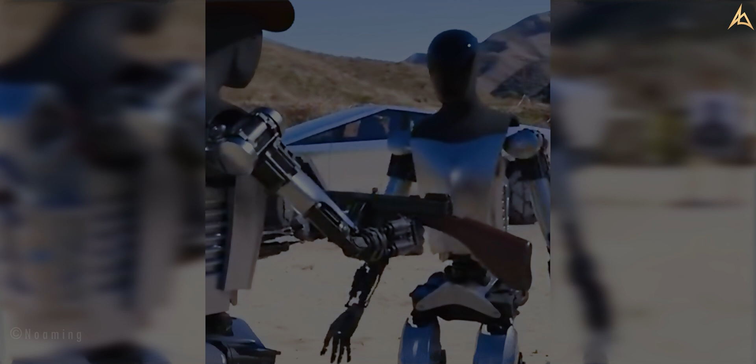For centuries, robots have been the stuff of dreams and nightmares. From the silver screen to factory floors, they've captured our imagination, fueled our anxieties, and hinted at a future where machines and humans coexist.

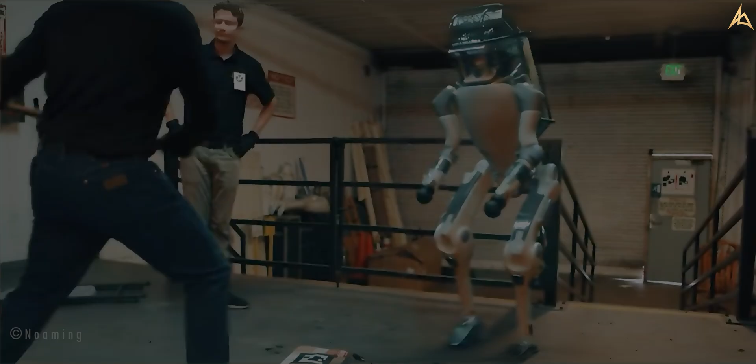We built our world for ourselves, skyscrapers that pierce the clouds, machines that dance to our commands. But what if, one day, those machines reached back?

Welcome to Tesla AI Day 2022. I do want to set some expectations with respect to our Optimus robot. As you know, last year it was just a person in a robot suit.

The Tesla bot promises to revolutionize the way we live and work, from the assembly line to the operating room, from the delivery truck to the construction site. These machines will change the game.

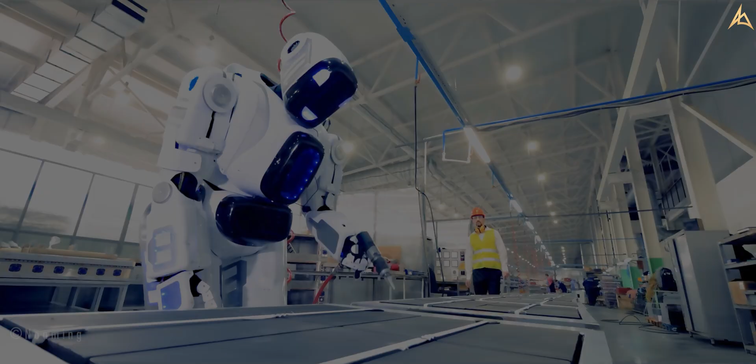But this revolution comes with a question. What happens when robots can do our jobs better than we can? What happens to the workforce, to our communities, to our very sense of purpose?

The rise of the Tesla bot is not just a technological marvel. It's a catalyst for a deeper conversation about who we are, what we value, and what it means to be human in a world increasingly shaped by machines.

The future is coming, whether we're ready or not. But with careful planning and ethical considerations, the Tesla bot can be a force for good in the world. It can be a tool to empower us, to free us from drudgery, and to create a brighter future for all.

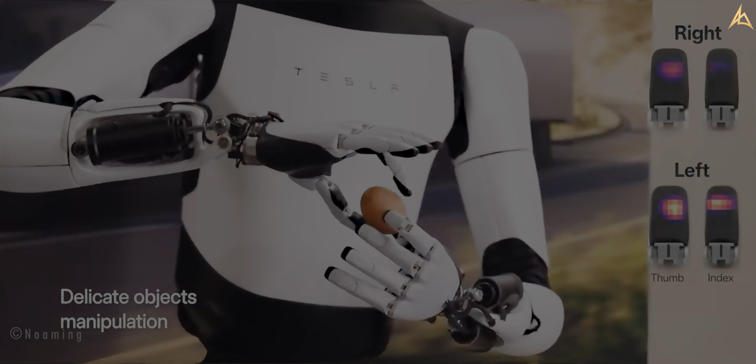This is the story of a revolution, not fought with weapons but with wires and code. The rise of a new species, born from our own ingenuity, yet destined to change everything. They are the Tesla bots, strong, agile, and eerily familiar.

They can build our homes, care for the sick, and even save our lives. But can we trust them? And more importantly, can we trust ourselves with the power we've created?

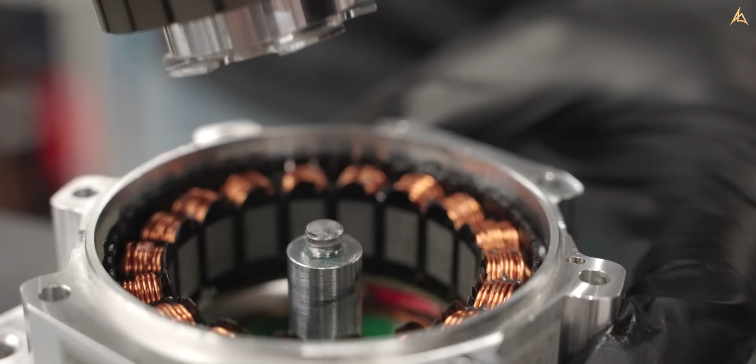In the heart of Silicon Valley, where dreams are forged in circuits and code, Tesla isn't just building cars anymore. They're building the future, a future where humans and machines walk hand in hand, not just on Mars, but right here on Earth. And at the center of this revolution stands the Tesla bot, a humanoid marvel poised to change everything.

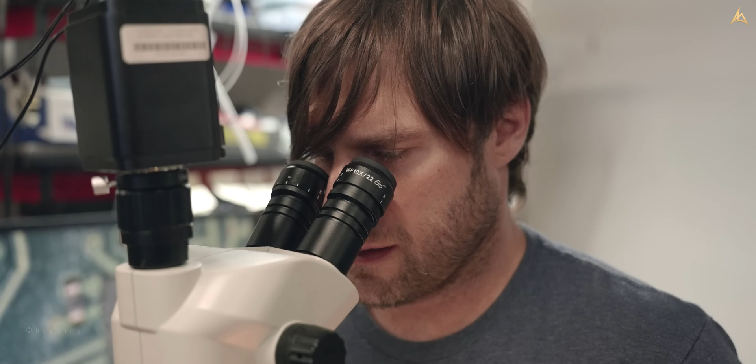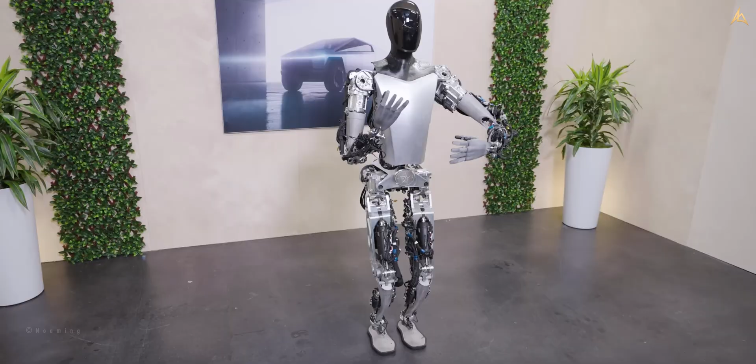Years of research, billions of dollars, and the unyielding vision of Elon Musk have culminated in this marvel of engineering. From the whisper-quiet electric motors to the intricate artificial muscles, the Tesla bot is a masterpiece of robotics.

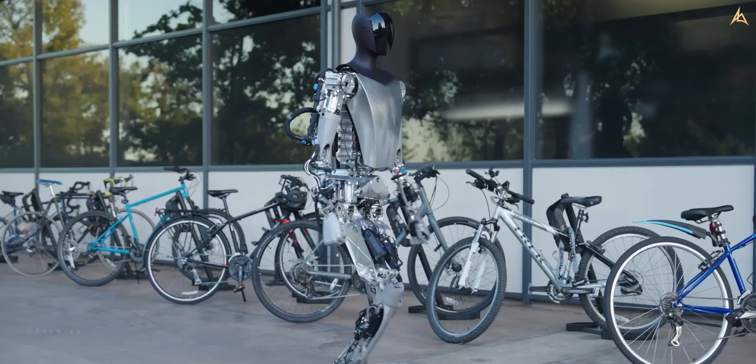It's not just about building a robot that can walk and pick things up. We're trying to create a machine that can understand the world around it, adapt to its surroundings, and interact with humans in a natural, intuitive way.

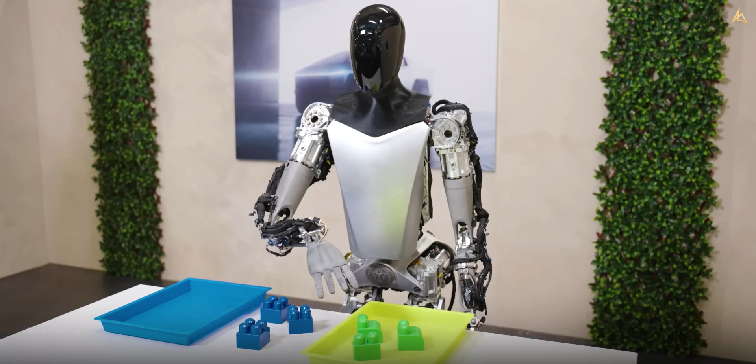But can this technological marvel truly become a part of our world? Or is the Tesla bot destined to remain a lab experiment, a glimpse of a future we're not yet ready for?

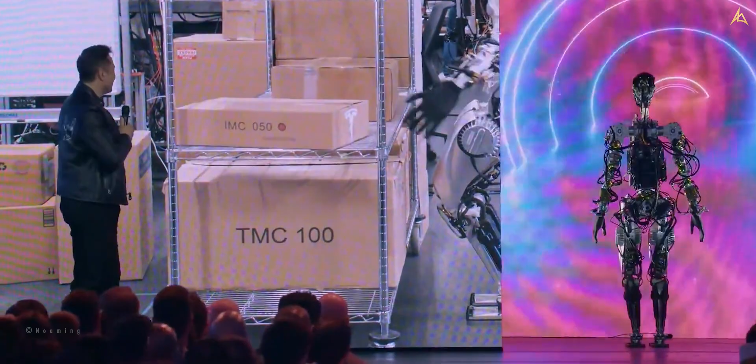Early adopters across the globe are getting a taste of this robotic future. For some, the Tesla bot is a helpful companion, easing the burden of daily chores and providing companionship.

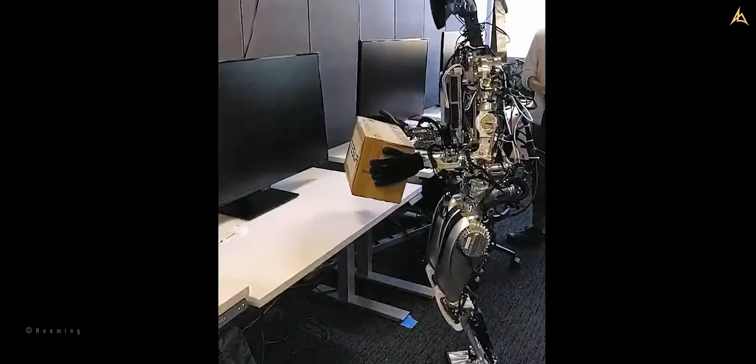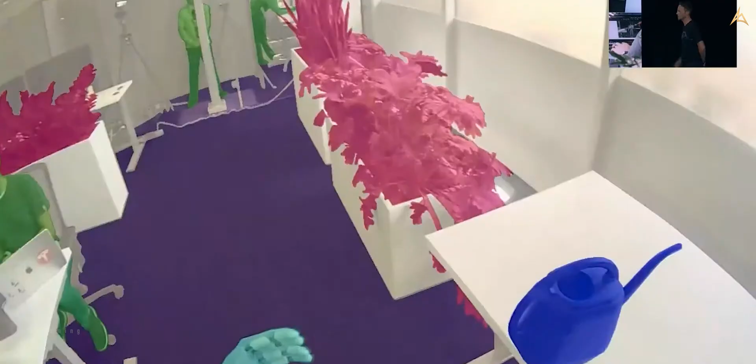It's amazing to have the extra help around the house. But sometimes it feels like the bot is taking over a bit too much. We have to remember that these are machines, not replacements for human connection.

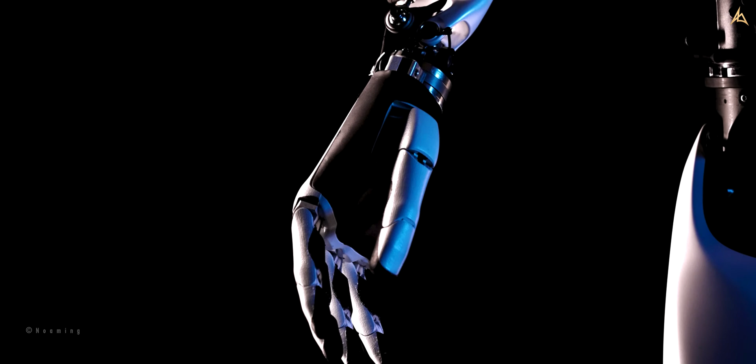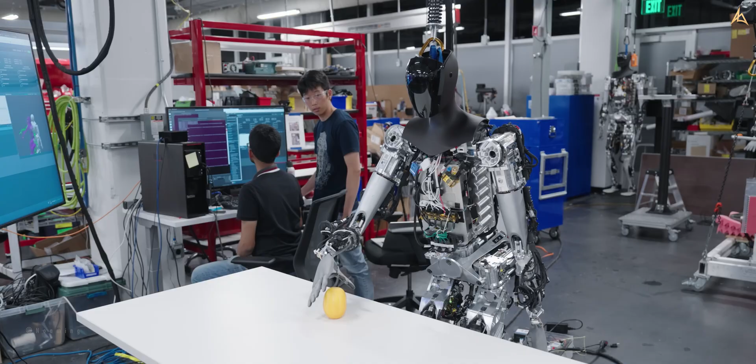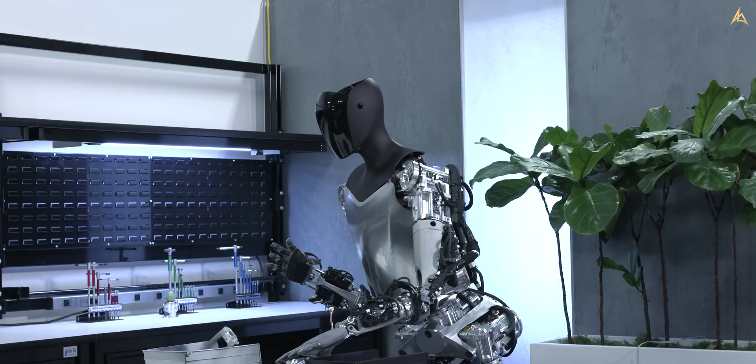The Tesla bot, a marvel of engineering, is more than just metal and wires. It's a symphony of interconnected systems working in perfect harmony to bring this robotic marvel to life. Let's delve into the orchestra pit of this technological wonder and understand how each system plays its part.

Perception is the foundation of any intelligent action. The Tesla bot sees the world through a multitude of eyes. High-resolution cameras capture the visual landscape, while LiDAR sensors map the 3D environment with laser precision. This data symphony feeds into a powerful neural network, painting a detailed picture of the bot's surroundings.

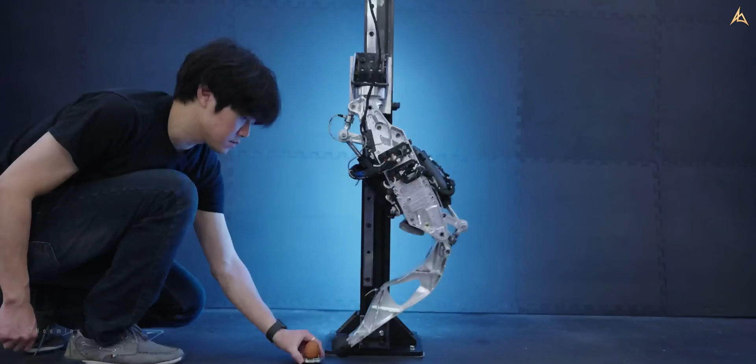The key is not just collecting data, but understanding it. Our AI algorithms decipher the visual and spatial information, identifying objects, obstacles, and even human gestures, allowing the bot to navigate and interact with the world in a meaningful way.

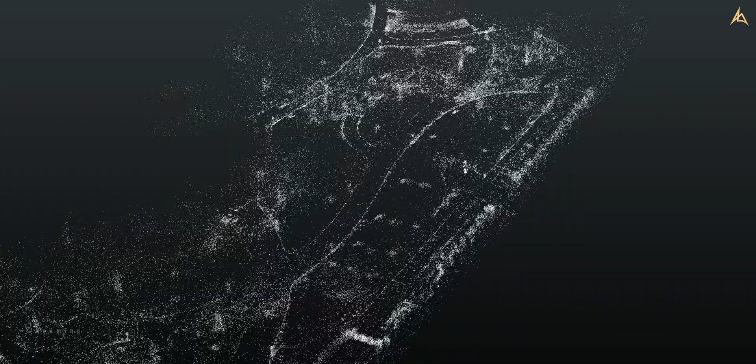Perception guides action, and the control system is the conductor of the bot's movements. Powerful electric motors drive its limbs, while intricate actuators provide fine-grained control over joints and limbs. This dance of power and precision allows the bot to walk, manipulate objects, and even perform delicate tasks with surprising dexterity.

We're constantly walking a tightrope. The bot needs to be agile and responsive, yet stable and energy efficient. Our control algorithms are constantly learning and adapting, ensuring that every movement is precise and controlled.

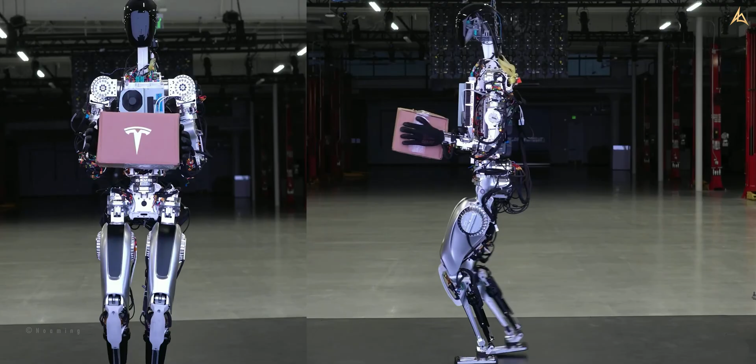The orchestra needs its instruments, and the bot's power comes from a high-density battery pack. But simply having power isn't enough. An intelligent energy management system optimizes energy consumption, ensuring the bot can perform its tasks throughout the day without needing frequent recharging.

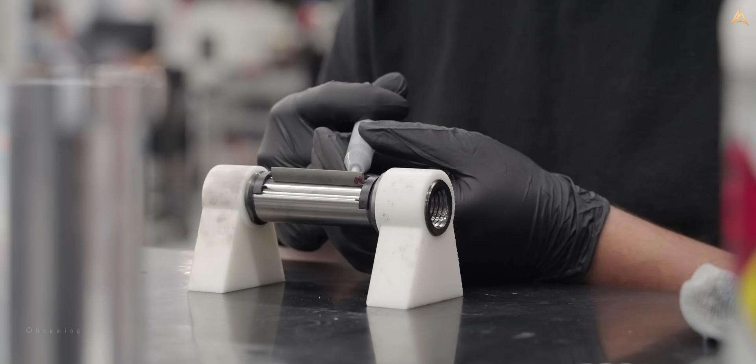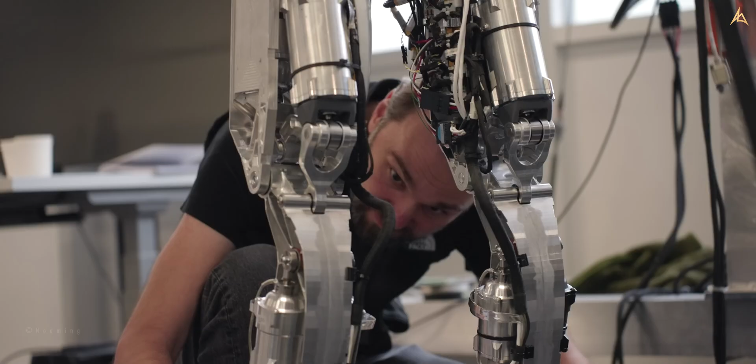The batteries are the lifeblood of the bot, and future advancements in energy density and charging technology will be crucial for expanding its capabilities and autonomy. The Tesla bot is a complex orchestra, each system playing its part in the symphony of its movement and intelligence. But this is just the beginning. As AI and robotics continue to evolve, the bot's capabilities will expand, its interactions with the world becoming richer and more nuanced.

The dream of a humanoid robot, a mechanical companion that walks beside us and shares our world, has captivated humanity for centuries. But in 2021, that dream took a bold step towards reality with the birth of the Tesla bot. It wasn't just another electric car launch. This was a glimpse into a future where machines weren't just tools, but partners. Elon Musk, the visionary behind Tesla, laid out his vision for the Tesla bot, a general-purpose humanoid robot capable of handling tasks dangerous, repetitive, or simply tedious for humans.

The road was paved with challenges, balancing dexterity with strength, mimicking human movement with artificial muscles, and developing AI capable of understanding and reacting to a complex world. These were just some of the hurdles the Tesla team faced. Every detail, every component, was meticulously crafted to bring Musk's vision to life. From the whisper-quiet motors to the bio-inspired hand design, the Tesla bot was a testament to human ingenuity and relentless pursuit of progress.

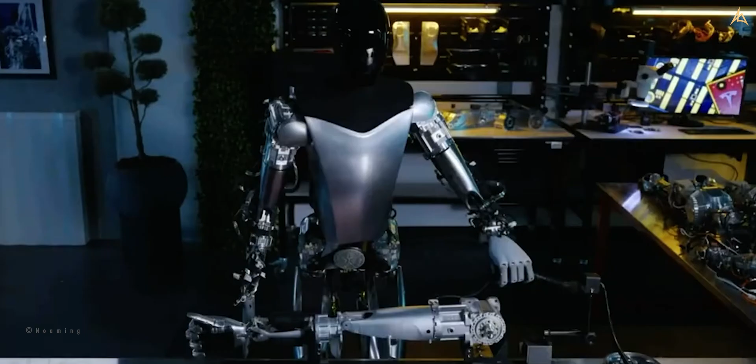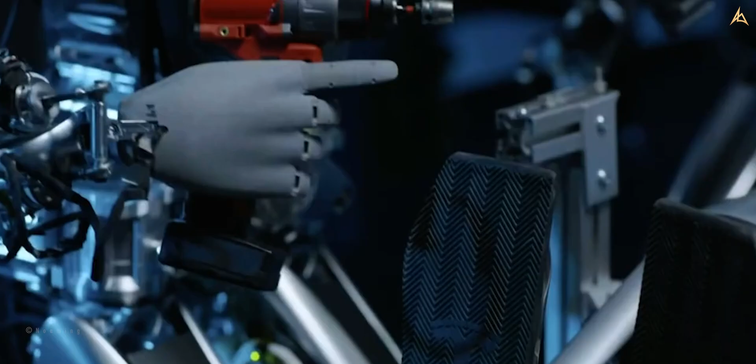In the race toward the future, Tesla, the electric vehicle giant, is now setting its sights on a new horizon: humanoid robots. Elon Musk, the visionary CEO, aims to bring his creation, Optimus, to the market by 2027. The ambitious project has sparked a hiring spree at Tesla, with over 50 jobs dedicated to making Optimus a reality. The Tesla careers page reveals a surge in hiring for roles related to the Tesla bot, or Optimus. Positions such as humanoid controls engineer and systems design and integration engineer are advertised, all based in Palo Alto, California.

A recent video update from Tesla showcased Optimus self-calibrating its arms and legs, demonstrating its capability to sort building blocks and even engage in yoga stretches using Tesla's onboard neural net.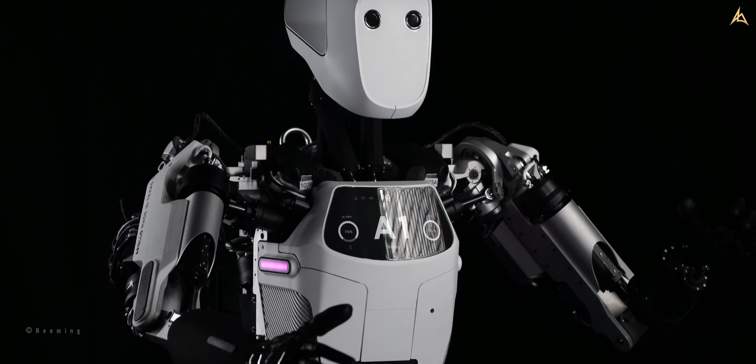While Tesla is racing to bring Optimus to life, some US-based competitors are already testing humanoid robots. Texas-based Apptronik launched Apollo, a robot standing 5 feet 8 inches tall, capable of carrying up to 55 pounds. Agility Robotics, with its robot Digit, is being tested in Amazon's Research and Development Center. With competitors making strides, Tesla faces the challenge of catching up.

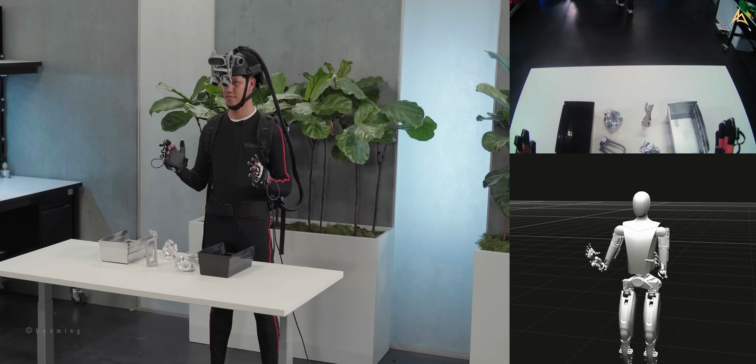The field of humanoid robots is rapidly evolving, with potential applications in retail, manufacturing, and logistics. As Elon Musk and his team push the boundaries of innovation, the future holds the promise of a world where humanoid robots coexist with humans. Yet, challenges and competition abound, and only time will tell if Optimus becomes the transformative force envisioned by Tesla.

The Tesla bot stands as a testament to human ingenuity, a glimpse of a future where technology seamlessly integrates with our lives. But this future is not guaranteed. It hinges on our ability to make wise choices, to navigate the ethical minefield, and to ensure that the robots we create serve humanity, not replace it.

So last year we unveiled the Tesla bot concept, but a concept doesn't get us very far. We knew we needed a real development and integration platform to get real-life learnings as quickly as possible. So that robot that came out and did the little routine for you guys, we had that within 6 months, built, working on software integration, hardware upgrades over the months since then. But in parallel, we've also been designing the next generation, this one over here.

So this guy is rooted in the foundation of sort of the vehicle design process. We're leveraging all of those learnings that we already have. Obviously, there's a lot that's changed since last year, but there's a few things that are still the same, you'll notice. We still have this really detailed focus on the true human form. We think that matters for a few reasons. But it's fun. We spend a lot of time thinking about how amazing the human body is. We have this incredible range of motion, typically really amazing strength.

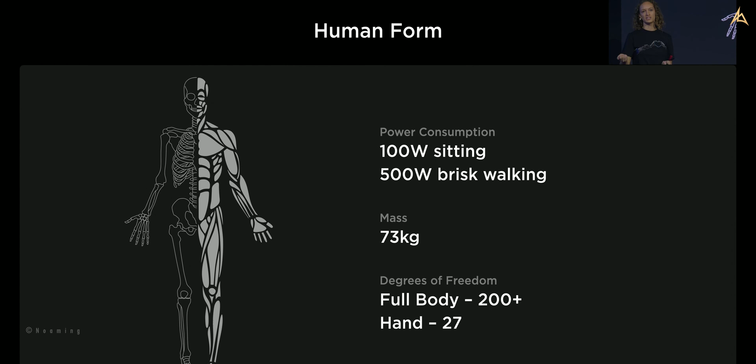So let's talk about this latest generation in some detail, shall we? On the screen here, you'll see in orange our actuators, which we'll get to in a little bit, and in blue our electrical system. So now that we have our human-based research, and we have our first development platform, we have both research and execution to draw from for this design. Again, we're using that vehicle design foundation, so we're taking it from concept through design and analysis, and then build and validation. Along the way, we're going to optimize for things like cost and efficiency because those are critical metrics to take this product to scale eventually.

How are we going to do that? Well, we're going to reduce our part count and our power consumption of every element possible. We're going to do things like reduce the sensing and the wiring at our extremities. You can imagine a lot of mass in your hands and feet is going to be quite difficult and power consumptive to move around. And we're going to centralize both our power distribution and our compute to the physical center of the platform. So in the middle of our torso, actually it is the torso, we have our battery pack. This is sized at 2.3 kilowatt hours, which is perfect for about a full day's worth of work.

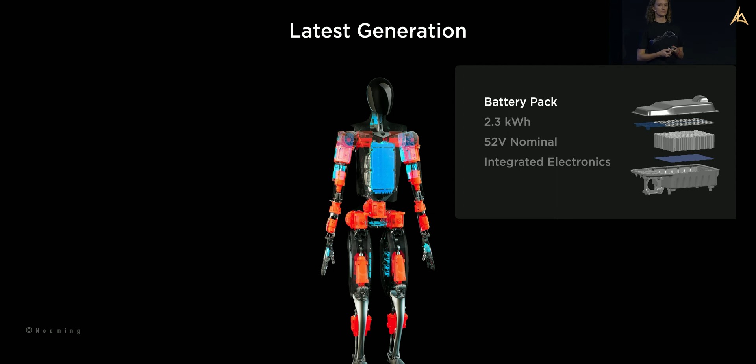What's really unique about this battery pack is it has all of the battery electronics integrated into a single PCB within the pack. So that means everything from sensing to fusing, charge management, and power distribution is all in one place. We're also leveraging both our vehicle products and our energy products to roll all of those key features into this battery. So that's streamlined manufacturing, really efficient and simple cooling methods, battery management, and also safety. And of course, we can leverage Tesla's existing infrastructure and supply chain to make it.

So going on to sort of our brain, it's not in the head, but it's pretty close. Also in our torso, we have our central computer. So as you know, Tesla already ships full self-driving computers in every vehicle we produce. We want to leverage both the autopilot hardware and the software for the humanoid platform, but because it's different in requirements and in form factor, we're going to change a few things first.

So it's going to do everything that a human brain does, processing vision data, making split-second decisions based on multiple sensory inputs, and also communications. So to support communications, it's equipped with wireless connectivity as well as audio support. And then it also has hardware-level security features, which are important to protect both the robot and the people around the robot.

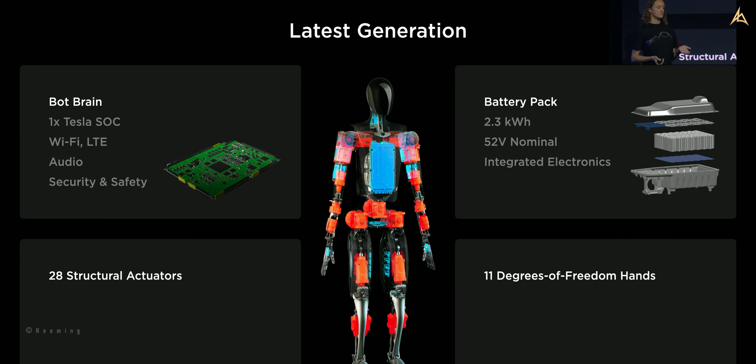So now that we have our sort of core, we're going to need some limbs on this guy. And we'd love to show you a little bit about our actuators and our fully functional hands as well. But before we do that, I'd like to introduce Malcolm, who's going to speak a little bit about our structural foundation for the robot.

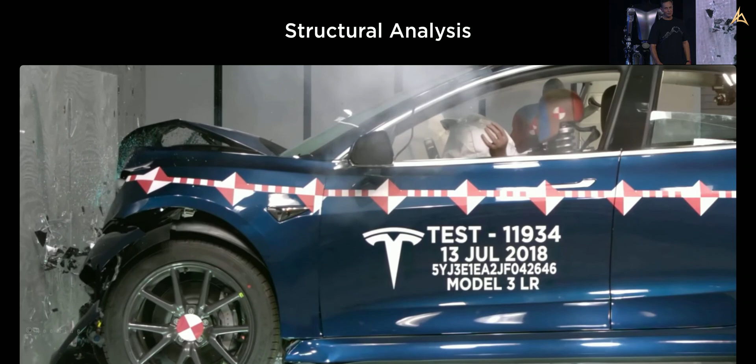So can we utilize our capabilities and our methods from the automotive side to influence a robot? Well, we can make a model. And since we had crash software, we're using the same software here, we can make it fall down. And the purpose of this is to make sure that if it falls down, ideally it doesn't, but it's superficial damage. We don't want it to, for example, break its gearbox in its arms. That's the equivalent of a dislocated shoulder for a robot. Difficult and expensive to fix. So we want it to dust itself off and get on with the job it's been given.

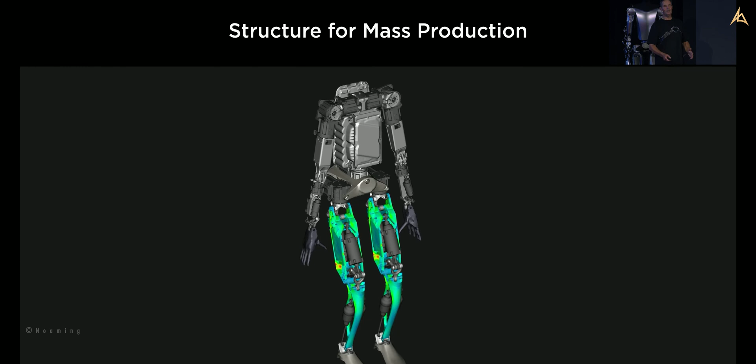We can also take the same model and we can drive the actuators using the inputs from a previously solved model, bringing it to life. So this is producing the motions for the tasks we want the robot to do. These tasks are picking up boxes, turning, squatting, walking upstairs. Whatever the set of tasks are, we can play to the model. This is showing just simple walking. We can create the stresses in all the components. That helps us to optimize the components.

These are not dancing robots. These are actually the modal behavior, the first 5 modes of the robot. And typically, when people make robots, they make sure the first mode is up around the top single figures, up towards 10 hertz. The reason to do this is to make the controls of walking easier. It's very difficult to walk if you can't guarantee where your foot is, wobbling around. That's okay if you make one robot. We want to make thousands, maybe millions.

We haven't got the luxury of making them from carbon fiber and titanium. We want to make them from plastic. Things are not quite so stiff. So we can't have these high targets, I call them dumb targets; we've got to make them work at lower targets. So is that going to work?

Well, if you think about it, sorry about this, but we're just bags of soggy jelly and bones thrown in. We're not high frequency. If I stand on my leg, I don't vibrate at 10 hertz. People operate at low frequency, so we know the robot actually can. It just makes controls harder. So we take the information from this, the modal data and the stiffness, and feed that into the control system. That allows it to walk.

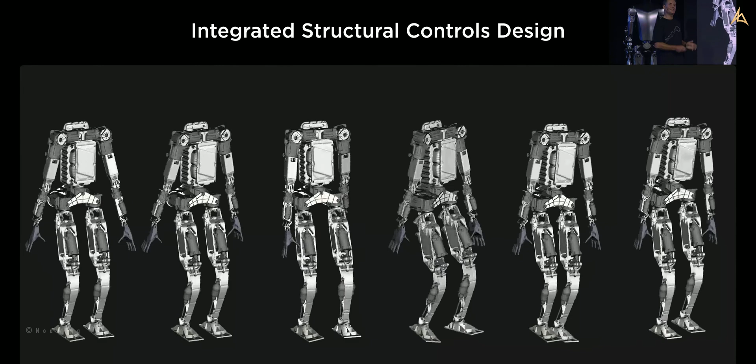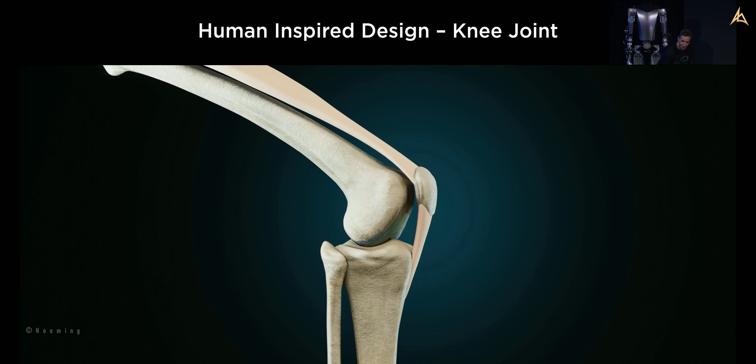Just changing tack slightly, looking at the knee. We can take some inspiration from biology, and we can look to see what the mechanical advantage of the knee is. It turns out it actually represents something quite similar to a 4-bar link, and that's quite non-linear. That's not surprising, really, because if you think when you bend your leg down, the torque on your knee is much more when it's bent than it is when it's straight. So you'd expect a non-linear function. And in fact, the biology is non-linear. This matches it quite accurately.

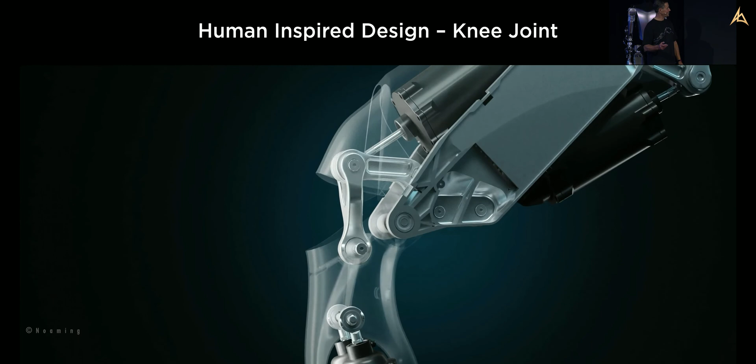So that's a representation. The 4-bar link is obviously not physically a 4-bar link, as I said, but the characteristics are similar. Me bending down isn't very scientific though, so let's be a bit more scientific.

We've played all the tasks through this graph, showing picking things up, walking, squatting - the tasks we did on the stress test. This is the torque seen at the knee against the knee bend on the horizontal axis, showing the requirement for the knee to do all these tasks. I've put a curve through it, surfing over the top of the peaks, saying this is what's required to make the robot do these tasks.

So if we look at the 4-bar link, that's actually the green curve, and it's saying that the non-linearity of the 4-bar link has linearized the characteristic of the force. What that really says is it's lowered the force - that's what makes the actuator have the lowest possible force, which is the most efficient. We want to burn energy up slowly.

What's the blue curve? Well, the blue curve is actually if we didn't have a 4-bar link, and just had an arm sticking out of the leg here with an actuator on it - a simple 2-bar link. That's the best we could do with a simple 2-bar link, and it shows that would create much more force in the actuator, which would not be efficient.

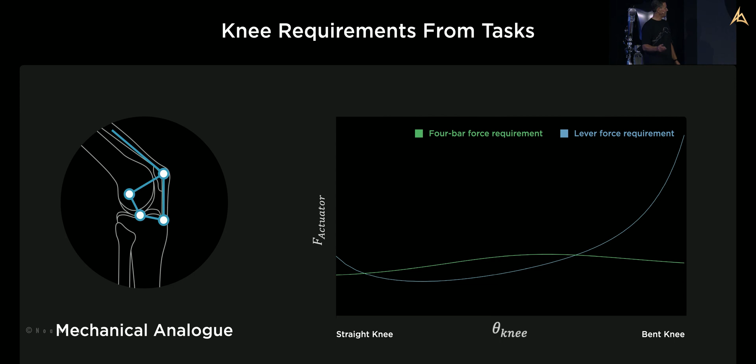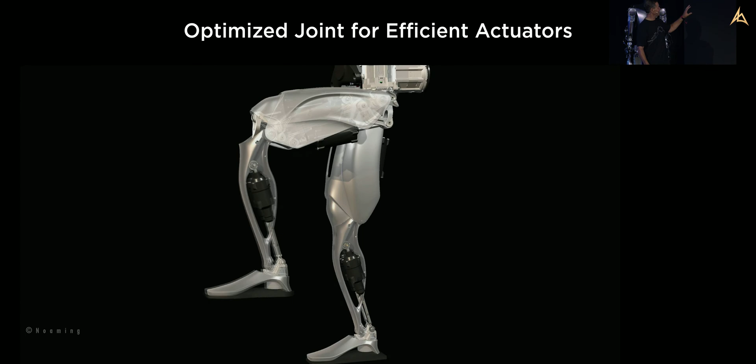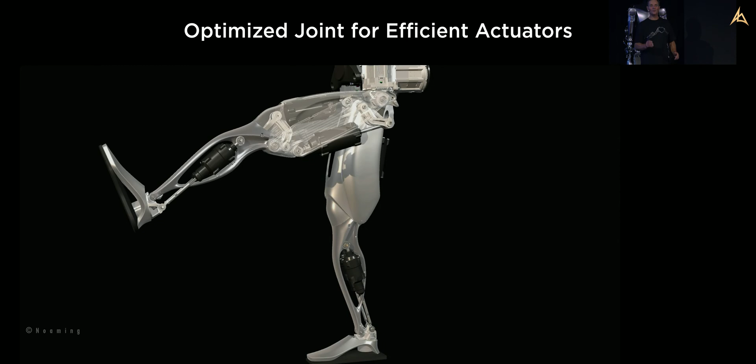So what's that look like in practice? Well, as you'll see, it's very tightly packaged in the knee. You'll see it go transparent in a second - you'll see the 4-bar link there. It's operating on the actuator, determining the force and the displacements on the actuator. I'll now pass you over to Konstantinos, who'll tell you a lot more detail about how these actuators are made and designed and optimized. Thank you.

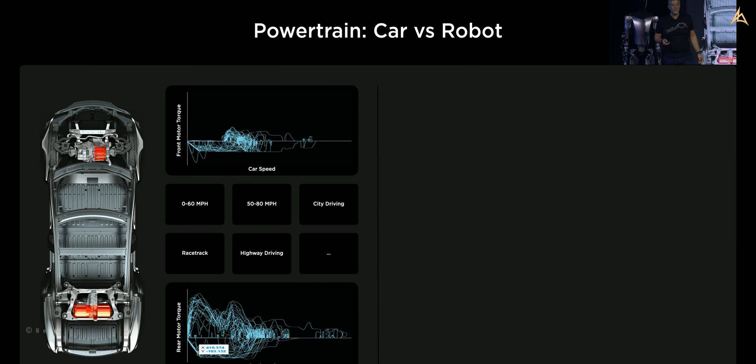So in this particular case, you see a car with 2 drive units, and the drive units are used to accelerate the car for a 0 to 60 miles per hour time or drive a city drive cycle. While the robot has 28 actuators, it's not obvious what the tasks are at actuator level. So we have tasks that are higher level, like walking, climbing stairs, or carrying a heavy object, which need to be translated into joint specs.

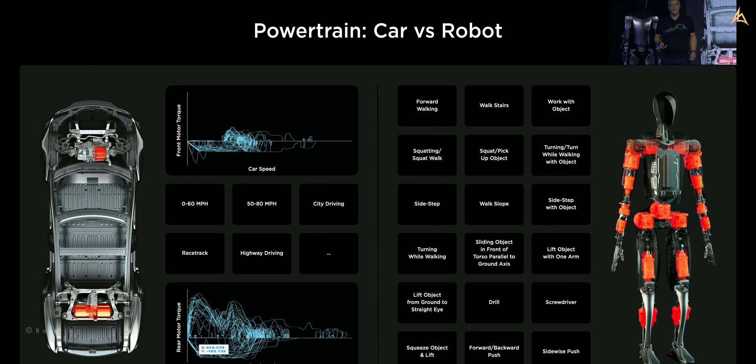Therefore, we use our model that generates the torque speed trajectories for our joints, which subsequently is fed into our optimization model to run through the optimization process.

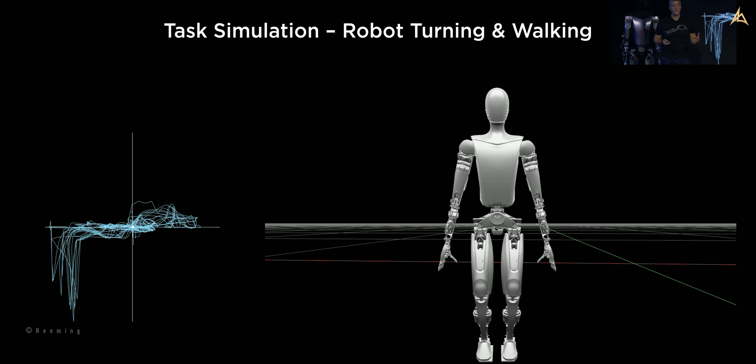This is one of the scenarios the robot is capable of doing, which is turning and walking. So when we have this torque speed trajectory, we lay it over an efficiency map of an actuator, and we're able, along the trajectory, to generate the power consumption and cumulative energy for the task versus time.

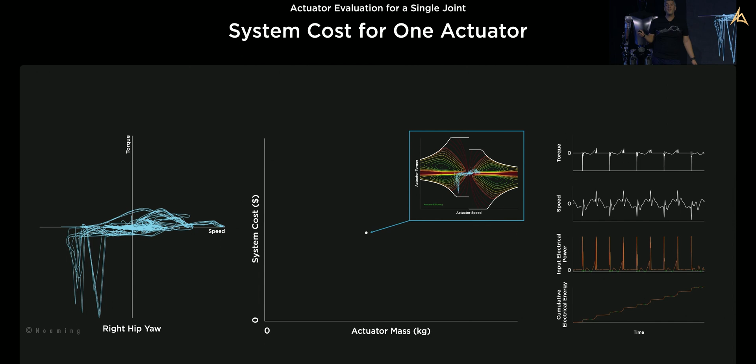This allows us to define the system cost for the particular actuator and put a simple point into the cloud. Then we do this for hundreds of thousands of actuators by solving in our cluster, and the red line denotes the Pareto front, which is the preferred area where we look for our optimal. The X denotes the preferred actuator design we've picked for this particular joint.

So now we need to do this for every joint. We have 28 joints to optimize, and we parse our cloud again for every joint spec, and the red X's this time denote the bespoke actuator designs for every joint. The problem here is that we have too many unique actuator designs, and even if we take advantage of symmetry, there are still too many. To make something mass manufacturable, we need to reduce the number of unique actuator designs.

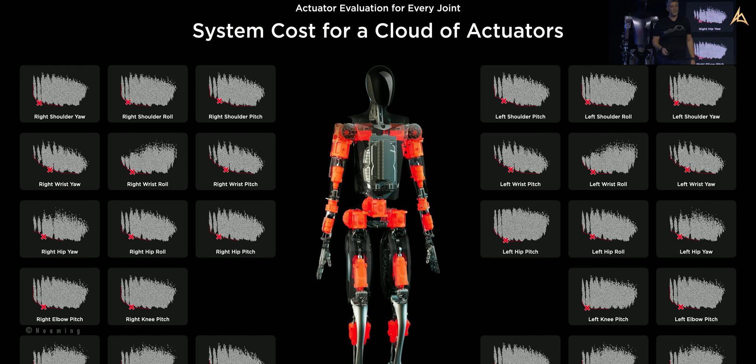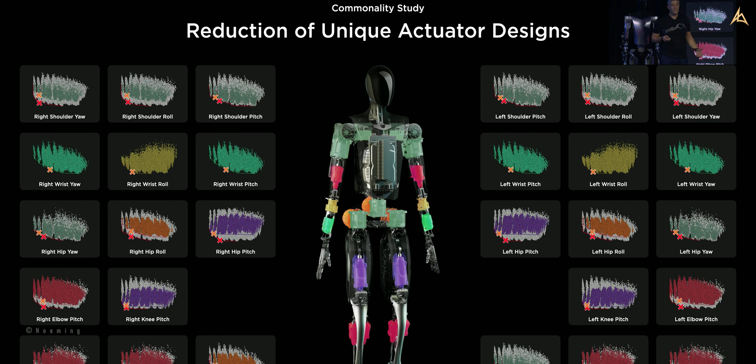Therefore, we run something called a commonality study, where we parse our cloud again, looking this time for actuators that simultaneously meet the joint performance requirements for more than one joint at the same time. The resulting portfolio is 6 actuators, shown in a color map in the middle figure, and the actuators can also be viewed in this slide. We have 3 rotary and 3 linear actuators, all of which have a great output force or torque per mass.

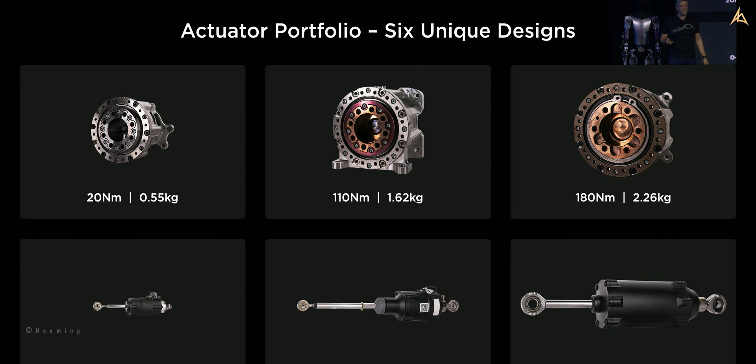The rotary actuator in particular has a mechanical clutch integrated on the high-speed side, angular contact ball bearing, and on the low-speed side, a cross-roller bearing, and the gear train is a strain-wave gear. There are 3 integrated sensors here and a bespoke permanent magnet machine.

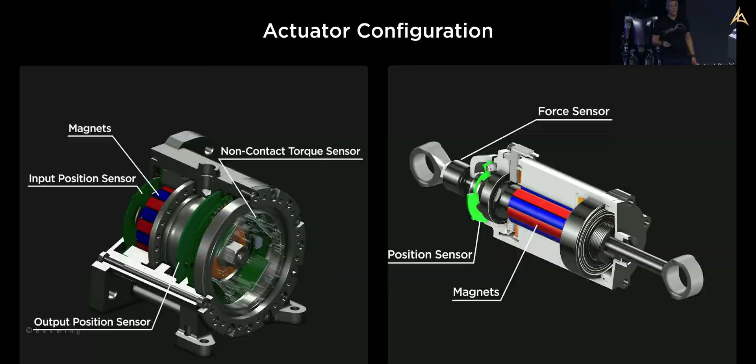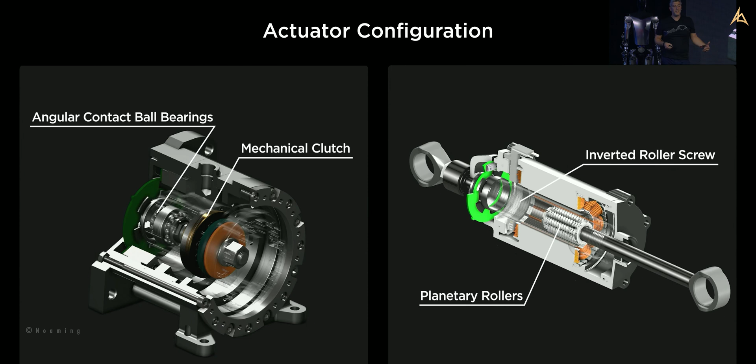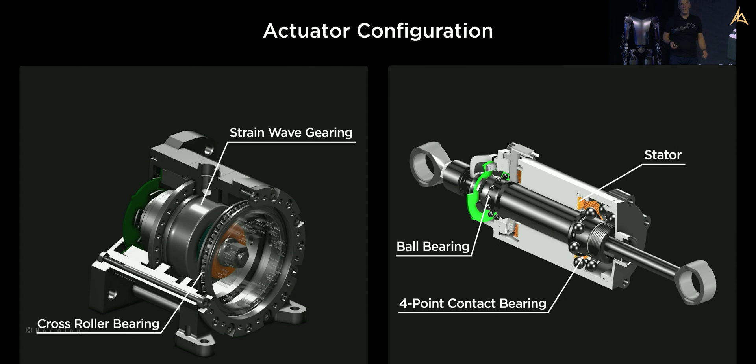The linear actuator has planetary rollers and an inverted roller screw as a gear train, which allows efficiency, compaction, and durability. So in order to demonstrate the force capability of our linear actuators, we have set up an experiment in order to test it under its limits.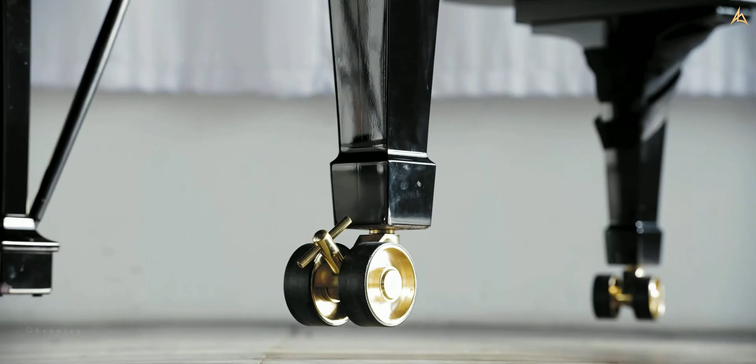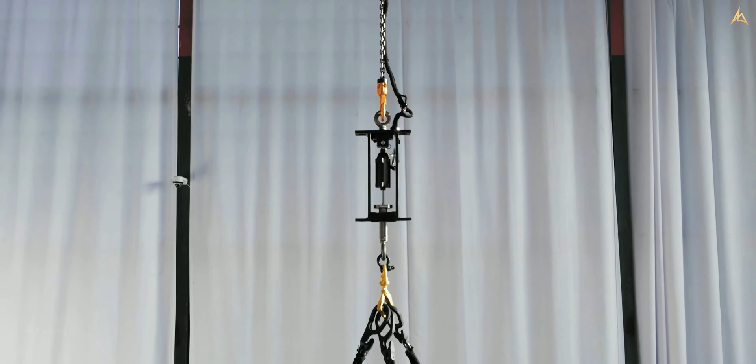And I will let you enjoy the video. So our actuator is able to lift a half-ton, 9-foot concert grand piano.

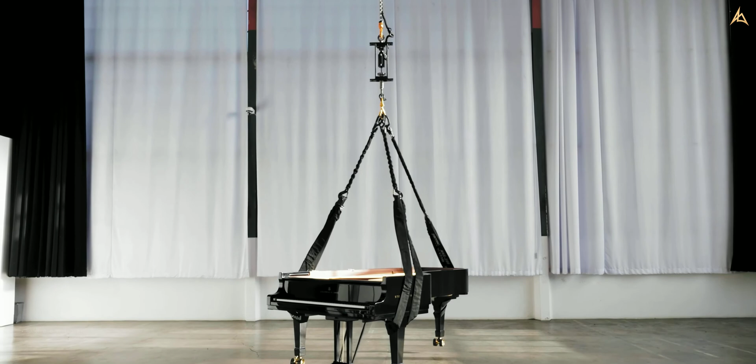And this is a requirement. It's not something nice to have, because our muscles can do the same when they are direct driven. When they are directly driven, our quadricep muscles can do the same thing. It's just that the knee is an up-gearing linkage system that converts the force into velocity at the end effector of our heels, for purposes of giving the human body agility. So this is one of the main things that are amazing about the human body.

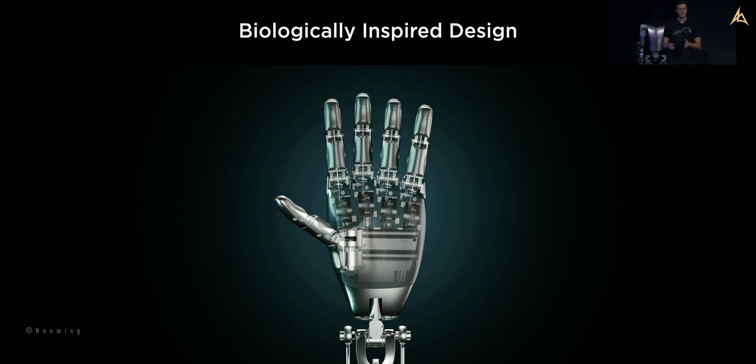Some basic stats about our hand is that it has 6 actuators and 11 degrees of freedom. It has an in-hand controller, which drives the fingers and receives sensor feedback. Sensor feedback is really important to learn a little bit more about the objects that we're grasping, and also for proprioception, which is the ability for us to recognize where our hand is in space.

One of the important aspects of our hand is that it's adaptive. This adaptability involves complex mechanisms that allow the hand to adapt to the objects being grasped. Another important part is that we have a non-backdrivable finger drive. This clutching mechanism allows us to hold and transport objects without having to turn on the hand motors.

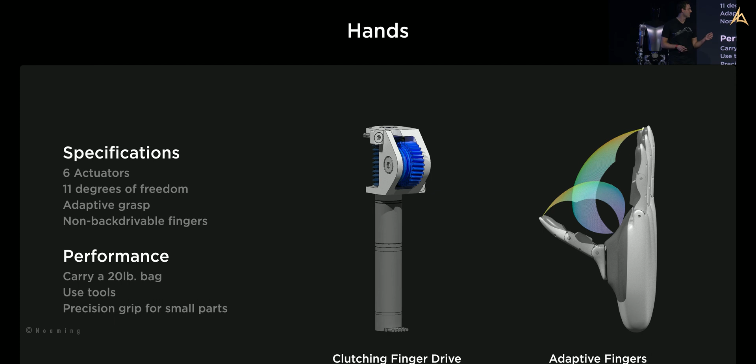All right, so all those cool things we've shown earlier in the video were possible just in a matter of a few months, thanks to the amazing work that we've done on Autopilot over the past few years. Most of those components ported quite easily over to the bot's environment. If you think about it, we're just moving from a robot on wheels to a robot on legs. So some of the components are pretty similar, and some others require more heavy lifting.

So for example, our computer vision neural networks were ported directly from Autopilot to the bot's situation. It's exactly the same occupancy network, which we'll talk into more details later with the Autopilot team, that is now running on the bot here in this video. The only thing that changed really is the training data that we had to recollect.

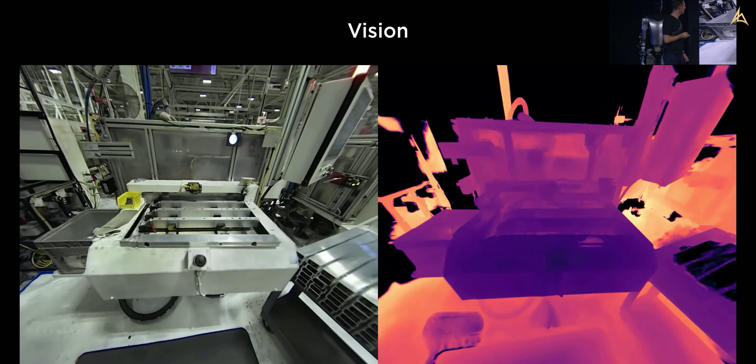We're also trying to find ways to improve those occupancy networks using work made on neural radiance fields to get really great volumetric rendering of the bot's environments. For example, here, some machinery that the bot might have to interact with.

Another interesting problem to think about is, in indoor environments, mostly with absence of GPS signal, how do you get the bot to navigate to its destination—say, for instance, to find its nearest charging station. So we've been training neural networks to identify high-frequency key points within the bot's camera streams, and track them across frames over time as the bot navigates through its environment, using those points to get a better estimate of the bot's pose and trajectory as it's walking.

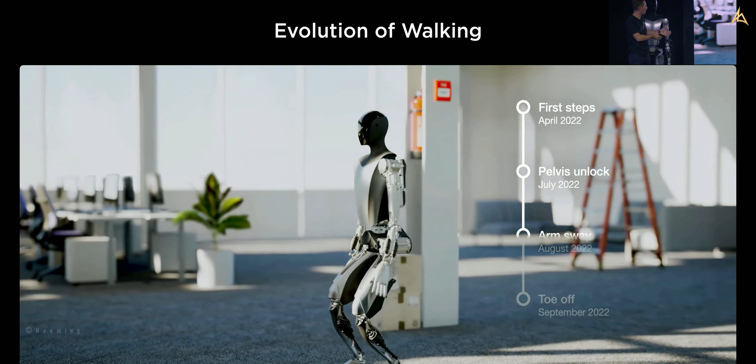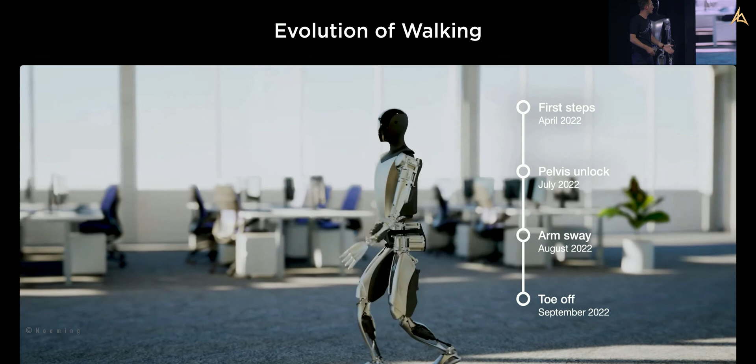We also did quite some work on the simulation side. This is literally the Autopilot simulator, to which we've integrated the robot's locomotion code. This video shows the motion control code running in the simulator, showing the evolution of the robot's walk over time. We started quite slowly in April and accelerated as we unlocked more joints and deployed more advanced techniques like arm balancing over the past few months. Locomotion is one component that's very different as we move from the car to the bot's environment, so I'd like my colleagues to talk about this now.

Thank you, Milan. Hi everyone, I'm Felix, a robotics engineer on the project, and I'm going to talk about walking. Walking seems easy, right? People do it every day—you don't even have to think about it. But there are some aspects of walking which are challenging from an engineering perspective.

For example, physical self-awareness—that means having a good representation of yourself: what is the length of your limbs, what is the mass of your limbs, what is the size of your feet. All that matters. Also having an energy-efficient gait—you can imagine there are different styles of walking, and not all of them are equally efficient. Most important, keep balance, don't fall. And of course, also coordinate the motion of all your limbs together.

Humans do all of this naturally, but as engineers or roboticists we have to think about these problems. I'm going to show you how we address them in our locomotion planning and control stack. We start with locomotion planning and our representation of the bot—a model of the robot's kinematics, dynamics, and contact properties. Using that model and the desired path for the bot, our locomotion planner generates reference trajectories for the entire system—feasible trajectories with respect to the assumptions of our model.

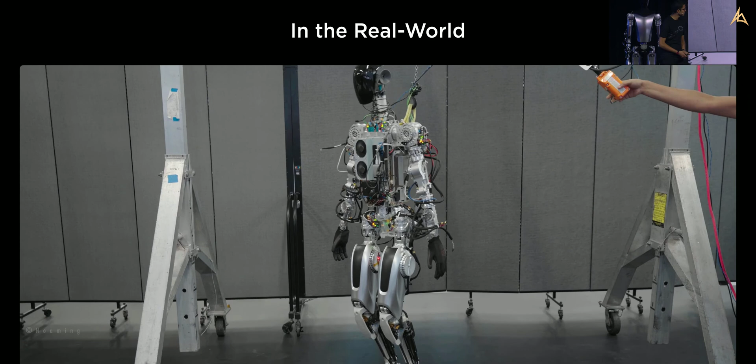Thank you, Felix. Hello everyone, my name is Anand, and I'm going to talk to you about controls. So let's take the motion plan that Felix just talked about and put it in the real world on a real robot. Let's see what happens. It takes a couple steps and falls down. Well, that's a little disappointing. But we are missing a few key pieces here, which will make it walk.

As Felix mentioned, the motion planner is using an idealized version of itself and of reality around it—this is not exactly correct. It also expresses its intention through trajectories and wrenches. Wrenches are forces and torques that it wants to exert on the world to locomote.

Reality is way more complex than any sim or model. Also, the robot is not simplified—it's got vibrations and modes, compliance, sensor noise, and on and on. So what does that do in the real world when you put the bot there? Well, the unexpected forces cause unmodeled dynamics, which the planner doesn't know about, and that causes destabilization, especially for a system that is dynamically stable like biped locomotion.

So what can we do about it? Well, we measure reality—we use sensors and our understanding of the world to do state estimation. Here you can see the attitude and pelvis pose, which is essentially the vestibular system in a human, along with the center of mass trajectory being tracked as the robot walks in the office environment.

Now we have all the pieces we need in order to close the loop. So we use our better bot model, we use the understanding of reality that we've gained through state estimation, and we compare what we want versus what we expect that reality is doing to us in order to add corrections to the behavior of the robot. Here, the robot certainly doesn't appreciate being poked, but it does an admirable job of staying upright.

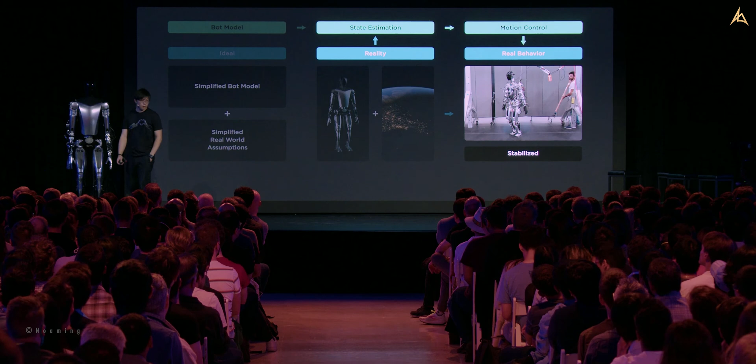Hi everyone, my name is Eric, robotics engineer on TeslaBot, and I want to talk about how we've made the robot manipulate things in the real world. We wanted to manipulate objects while looking as natural as possible, and also get there quickly. So what we've done is we've broken this process down into two steps. First is generating a library of natural motion references, or demonstrations, and then we've adapted these motion references online to the current real-world situation.

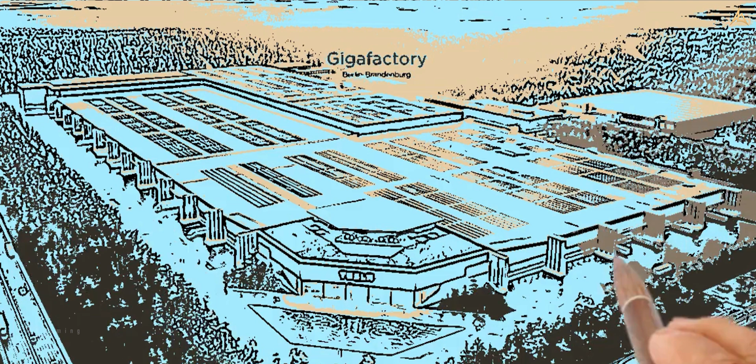On November 10, 2021, at the Giga-Texas factory, a malfunctioning robot designed to handle car parts reportedly attacked an engineer. Witnesses described a horrifying scene where the robot pinned the engineer, who was programming nearby robots, resulting in injuries to his back and arm. The incident, disclosed in a 2021 injury report filed by Tesla, documented the injuries as a laceration, cut, open wound. Astonishingly, the report claimed the engineer didn't need time off work, leaving us to question the accuracy of such reports.

The concerns extend beyond injuries. A worker's death on September 28, 2021, named Antelmo Ramirez, raises eyebrows. The official report attributes the death to heat stroke during the construction of Giga-Texas, but doubts linger. Despite these serious allegations, Tesla is yet to release a statement on the issue, leaving many questions unanswered. Last year, the Workers' Defense Project filed a complaint with OSHA, alleging that Tesla's contractors provided false safety certificates. Similar concerns have been voiced by state regulators and investigative journalism nonprofits.

As we navigate the future, the incident at Giga-Texas serves as a stark reminder of the potential pitfalls of rapidly advancing technology. The question remains, are we moving towards a future where robots and humans can coexist safely, or are we risking the very fabric of our workplace safety?

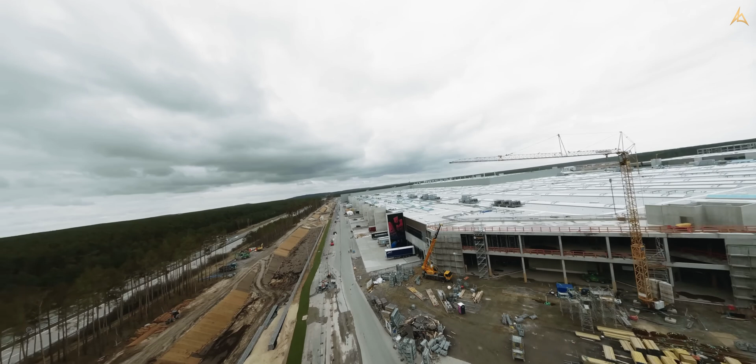The Tesla bot stands silent, a monument to human ingenuity, yet a silent sentinel at the crossroads of our future. It beckons us to ponder, to question. What does it mean to be human in a world where machines can mimic our movements, our thoughts, even our emotions? Inside this machine lies a paradox, a symphony of cold metal and hot silicon, driven by the spark of human imagination. Yet, it lacks something crucial, the spark of life, the warmth of a soul. Can we ever truly bridge this gap? Or are we destined to forever walk alongside our creations in a dance of both wonder and alienation?

The rise of the machines demands a re-evaluation of our values, our purpose in this world. We must ensure that technology serves humanity, not the other way around. The Tesla bot is not the answer, but a question about who we are, where we are going, and what it means to be human in a world that is constantly evolving. It is a challenge to our ingenuity, a call to our conscience, and a reminder that the future is not something that happens to us, but something we create.